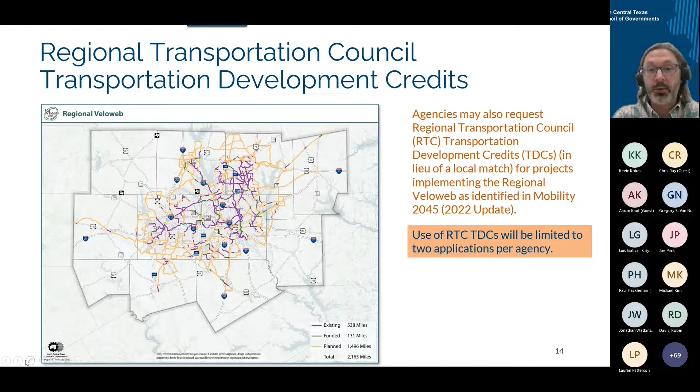So any agency may request the use of regional TDCs. However, that project must be constructing the regional VeloWeb. I'll also note that each agency is limited to 2 applications in which they request the use of regional TDCs. So this is a really great opportunity for making progress on that regional VeloWeb network. Next slide, please.

Overall, we do require some documentation for every application. These include a funding commitment, which can be in the shape of a letter or a local resolution. The funding commitment needs to outline what their local match contribution is, whether they're going to use TDCs or not, and if they're going to provide an overmatch. So that will be a requirement for the application.

We also require that all right-of-way or easements be acquired prior to the application submittal, so all property must be under public ownership. This is a big thing for us, primarily because transportation alternative set-aside funds have a 3-year timeline, or else they lapse. So we really need projects that have the right of way. Any project that has design completed at a certain point is more shovel ready and ready to be implemented and constructed, which is great. So that's part of the reasons for the requirements for this program.

There are other requirements depending on the context and location of your project. These include a railroad right of entry letter. If a project is within a TxDOT right of way, we do require that you also include a district engineer letter of consent.

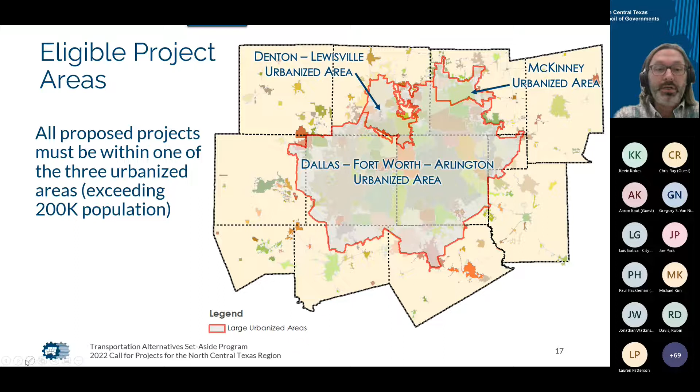And if you're on the fringe of this area and you're not quite sure about your eligibility for a particular project, on the next slide, we did develop an online interactive map for agencies to zoom in into more detail and to look at the eligible area boundaries to ensure that a project is eligible. This map also includes several other data sets used in the evaluation process for several of the application categories. These include the regional Veloweb. I mentioned earlier that the regional TDCs may be used to implement the regional Veloweb. If you want to make sure a project would construct the regional Veloweb, we have that layer that you can turn on.

We also have other data layers used for quantitative aspects of the evaluation process that will help agencies review the competitiveness of their projects. These include demand zones for walk bike travel, rail stations and the half-mile radius around rail stations for eligibility for the Safe Routes to Rail category. We also include data sets related to environmental justice, density of short trips, as well as pedestrian and bicycle crashes. So these are great resources to evaluate your project's competitiveness. Our goal with this map is to help agencies identify the strongest projects to submit, because we always like to have a strong competition for strong projects. So it's a good problem to have.

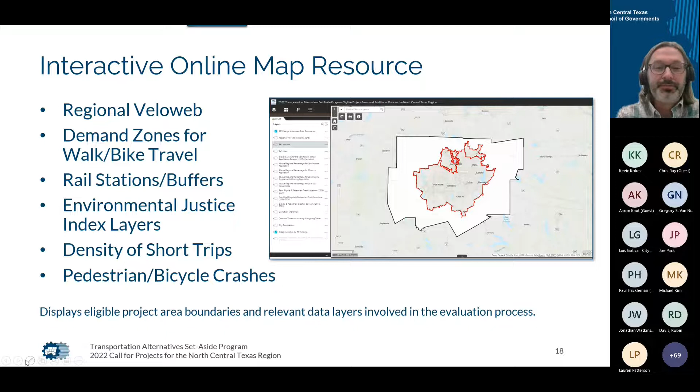So at this point in time, we've discussed the overview of the call for projects. Before we go into the evaluation and scoring of the 4 categories, I wanted to ask Aaron if he had noticed any questions so far that would be worth discussing real quick. Yeah, it looks like Kevin has been doing a really good job of addressing the questions in the chat already. So I think we're good to move on. Perfect.

Daniel, and again, for everyone, this is Kevin Kokes. I did want to note, related to the funding and projects that are eligible to submit in our urbanized area, and what Daniel mentioned about outside the urbanized area, that we do anticipate the state's call for projects opening later this year, and there's going to be a couple options there. There's going to be one for the rural areas and small cities, and then there's also going to be statewide funds. As we know more information when the state has published the rules for those calls, we're going to make that available to everyone. So if you have questions about, well, where's the best place to submit an application?

Is it under our regional call for projects in the urbanized area or to the state? Just contact us and we'll help strategize with you about what might be the most appropriate fit and the best place to submit your application.

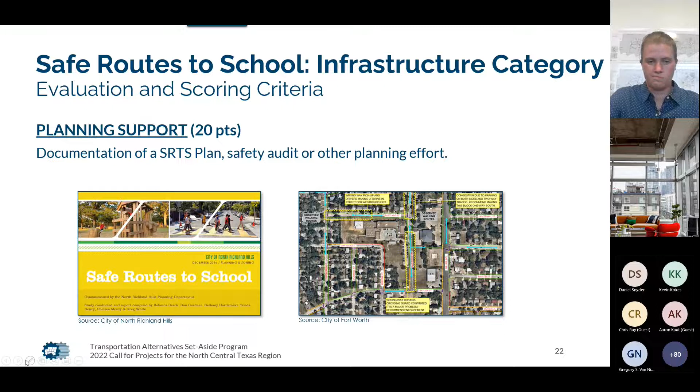For these two categories, potential to increase walking and biking, we're again looking to see the current conditions of students in the area, the distance of the project improvements to the school, any other places that would benefit from this project, and an estimated number of students that'll walk after. Then for equity, we'll be using Texas Education Agency's school report cards and looking at free and reduced lunch statistics.

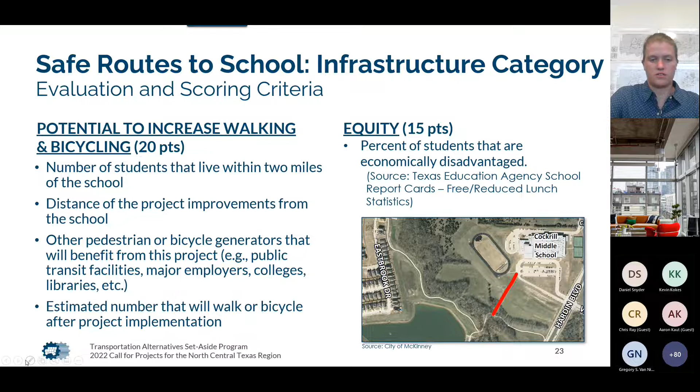Like Daniel said, the transportation alternative funds have a 3-year limit to them. So we're looking to see projects that are going to be ready to go almost immediately. Another big factor for project readiness is going to be support from both the school community and the greater community at large for walking and biking efforts.

Some more information about this Safe Routes to School category. You're able to submit a separate application for each school campus or group the schools in a number of ways: citywide, district-wide, or schools within close proximities that would benefit from the same infrastructure. Again, projects that will perform best on this category have previous precedents of planning efforts, site observations, and community input.

Moving on to education, slightly different criteria since it is a non-infrastructure project, but many of the same criteria will apply.

The activities that are eligible in this category include education materials, training for instructors, safety prizes for students, hiring a manager to run a Safe Routes to School program for a specific area, which could include a city, county, or other division that includes multiple schools, or the cost to hire a consultant to do the above activities.

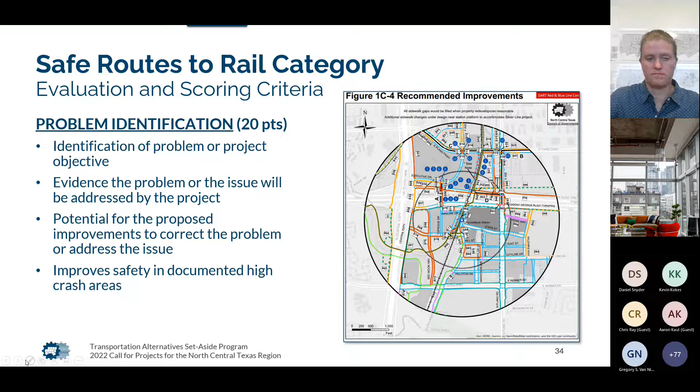Again, we're looking for projects identified as a need coming from a plan - a Safe Routes to Rail plan or another documented safety plan - precedent that this project has been thought about and recommended in the past.

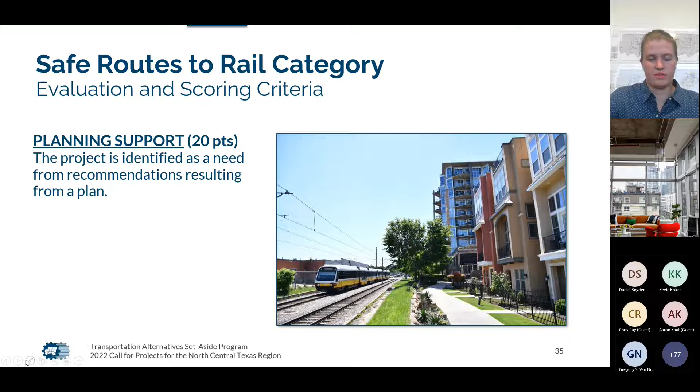We're looking at similar categories and criteria for potential to increase walking and biking, looking at potential transit riders, any other entities that would benefit from this project, the distance of the improvements to the station, and the estimated number of pedestrians and bicyclists after implementation.

The new transit accessibility category looks at whether the project closes a network gap, looking for improved access and shortened distances to access the existing rail station.

For equity, we're going to be looking at different environmental justice factors, including the NCTCOG Environmental Justice Indexes, minority population, and population under the poverty line for census tracts around the rail station.

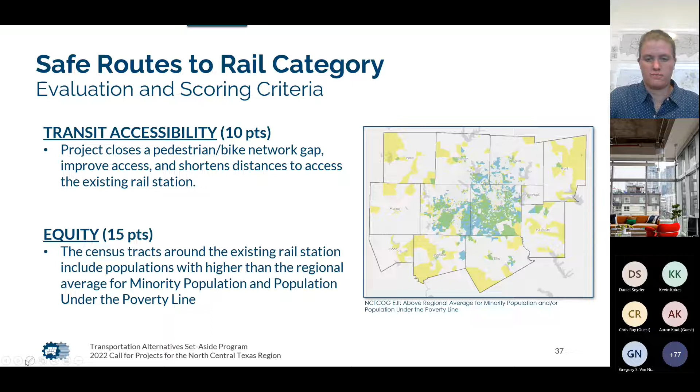Project readiness is very, very similar - again looking for projects that will be ready to go the quickest so we don't risk lapsing funds.

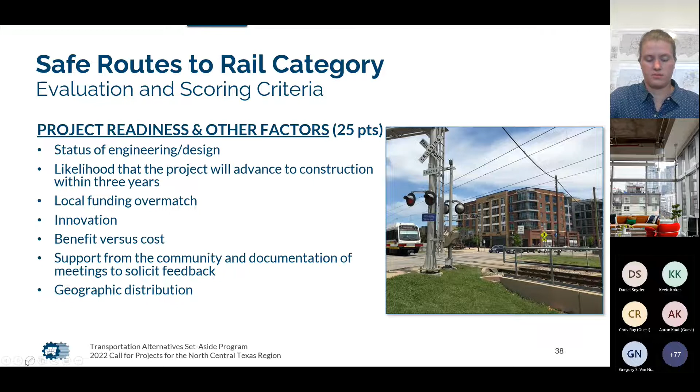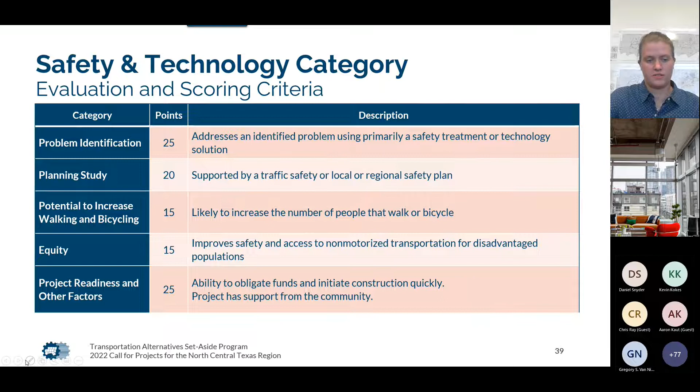Finally, the safety and technology category, very similar to all the rest. For this, problem identification looks for you to identify the problem and also the potential for these improvements to be a safety treatment or technology solution to address the issue.

For planning study, we'll be seeing if the area is identified in the NCTCOG Regional Pedestrian Safety Action Plan, and also if the project is identified in another local safety plan of some sort.

For potential to increase walking and bicycling in this category, we'll be looking at the Mobility 2045 demand zone for walking and biking travel, checking if the area is within a high or moderate demand zone, and again looking at other generators that will benefit from the project.

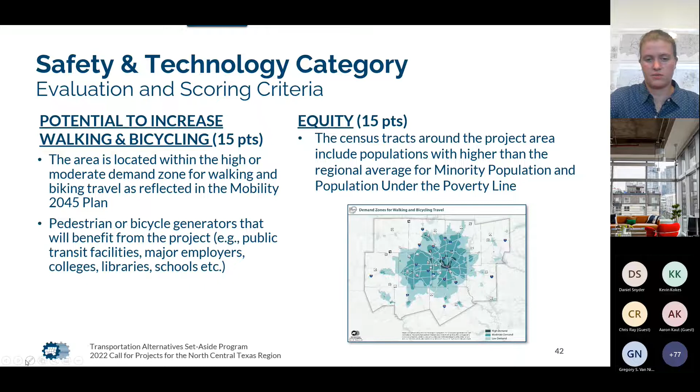For equity, we're again looking at the Environmental Justice Index from COG and other environmental justice factors. And finally, project readiness, again very similar - how fast can we get this going?

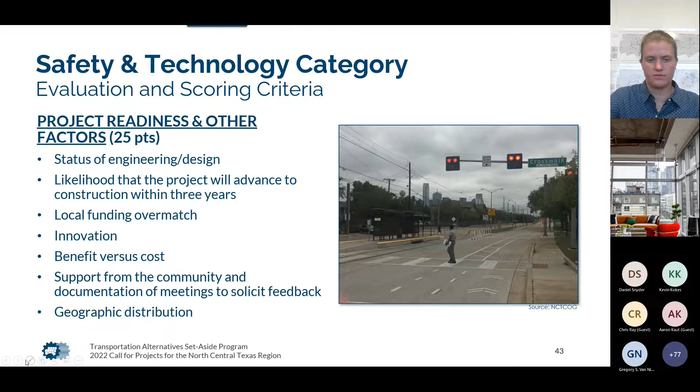And I believe that is it for me, I think. Yes, cool.

Thanks, Aaron. All right, so for the active transportation category, this one hasn't changed a whole lot over the years. At a high level, some of the categories involved are regional network connectivity, with the largest amount of points available.

We also consider access to major destinations, safety and comfort, how a project reduces congestion, equity, and reducing barriers, along with the other application categories we also look at project readiness and other factors. I'll go into a little more detail on the following slides.

At a high level, for the active transportation category, we are looking at projects that are implementing locally adopted plans. For agencies not familiar, TxDOT recently came out with a new tool called the Active Transportation Plan Inventory Tool, where in the application we include a question asking if the agency has submitted the local plan to the inventory. We include a link to the resource on the webpage and encourage agencies to submit their plans online.

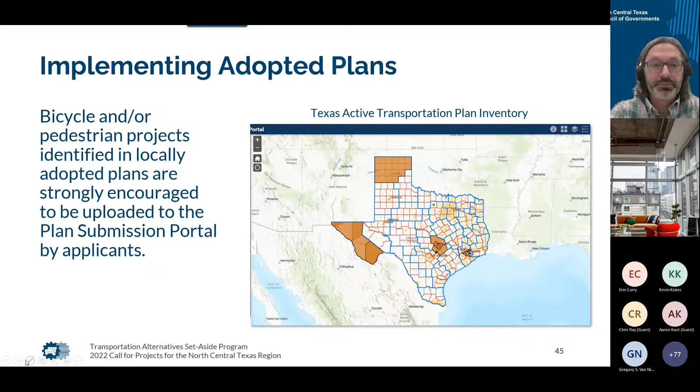With that, let's go to the next slide. The first category is regional network connectivity, where we look at the regional VeloWeb network. However, we also look at projects beyond just the regional VeloWeb.

If there's a project that connects to a regional VeloWeb, that will be taken into consideration. If there's an on-street connection to the regional VeloWeb, they'll get credit there as well. And if there's a pedestrian project that connects to a regionally significant destination, that's also important.

And with that, we can move on to the other categories.

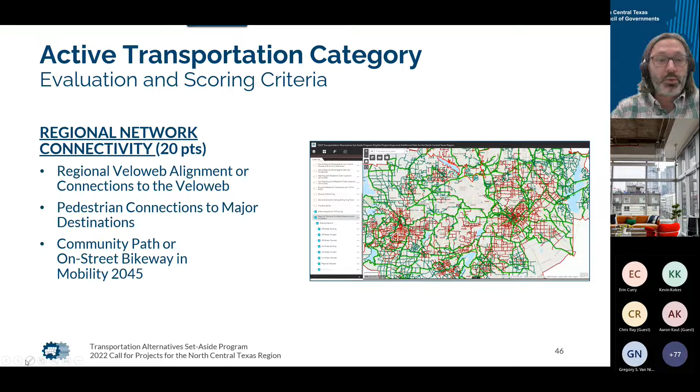That one's pretty straightforward. Access to major destinations looks at connections to employment centers, education institutions, and transit stations if available. We look at projects that close gaps or extend the network, and projects that provide a seamless connection to major destinations, or expand access to them. These are the things we evaluate.

Safety and comfort. Here we look at whether a project is within a high crash density area, so the online interactive map is a good tool to look at crash data and how close it is to your project. If there's a report documenting a safety issue and making a recommendation for a particular project, that will be taken into consideration as well. We also look at the level of comfort for the proposed facility—are you going beyond the minimum to provide the comfort people look for when they walk and bike?

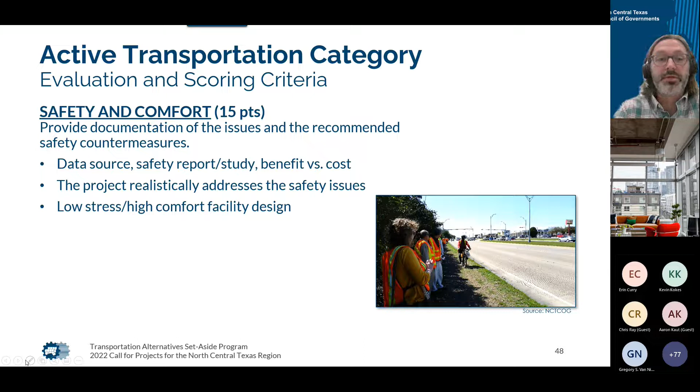Congestion reduction. Here we look at whether a project will contribute to decreasing motorized trips. On the online interactive map, we include a data set related to density of short trips, based on cellular data.

With that, we can look at whether a project is in an area where short trips can best be made by walking and bicycling. COG staff will also use a forecasting tool to estimate the number of people who might walk and bike on that particular project.

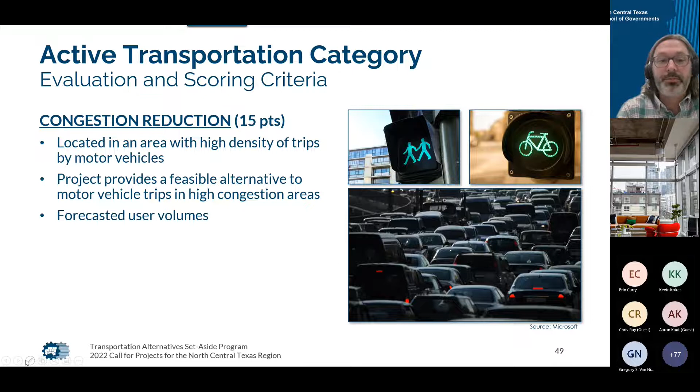In terms of equity, we have equity data on our online interactive map. We look at areas or census block groups that have a high percentage of low income, a high percentage of minority population, or a high percentage of zero-car households.

In the active transportation application, we include an open-ended question for applicants to explain how their project will contribute to equity, since census data only tells us so much. That question is a great opportunity to explain the context of where the project is and who it connects to.

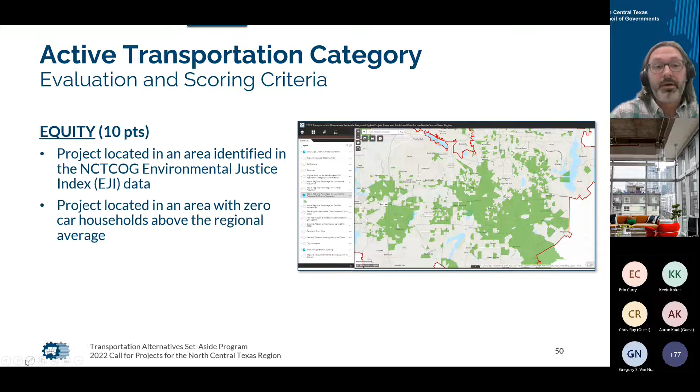For example, perhaps the project connects to a source of fresh produce in a neighborhood lacking fresh foods, or connects to health facilities, or affordable housing. These are things we at the regional level may not be aware of that will improve equity for that population.

Reducing barriers is pretty straightforward—does the project have a grade-separated crossing of a river, a railroad, or a highway? This category will award 5 points for that.

Project readiness and other factors: just like Aaron mentioned previously, if a project has a degree of engineering or design already complete, that will make it a stronger candidate.

If your project has innovative technology or treatments, I can tell you that including counters for your project is a really great way to incorporate technology and innovation. I'll also mention that projects with documentation showing they considered the utilities of the area where the project is located are viewed favorably.

We've had issues in the past where projects were funded in historical neighborhoods where not as much consideration was given, and the amount of utility relocation involved increased project costs astronomically, leaving the local agency responsible for those cost overruns. So we want to make sure utilities are taken into consideration—we want to avoid delaying projects as much as possible.

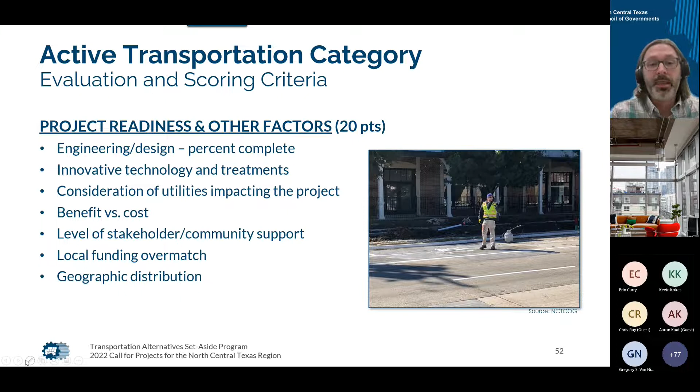All right, so with that, we covered the 4 application categories. I don't know if there's any questions in the chat at this point to discuss about those 4 categories.

Daniel, there was one question about, does it have to be at 30% design? I think the answer is design is not required to have been initiated to submit an application in this call. Obviously, if you completed some schematics, that's great because it helps the applicant understand any challenges or constraints to constructing that project, and hopefully gives a better sense of the project budget needs. But ultimately, the engineering, design, and environmental phases are 100% the requirements of the local applicant, and that would just need to be completed before the construction phase could begin. It's not necessary for that to have occurred before you submit an application.

And I think that's the only other question we've seen, Daniel. Perfect. Feel free to add questions as we go through.

This next section, I'll be highlighting general aspects of the application, regardless of which category you submit under. These are just high-level general aspects. In the application, we want to see a description of the project, what exactly is being requested, and why is that project being requested in the first place. We want to hear the story of what the existing conditions are and what that project will accomplish.

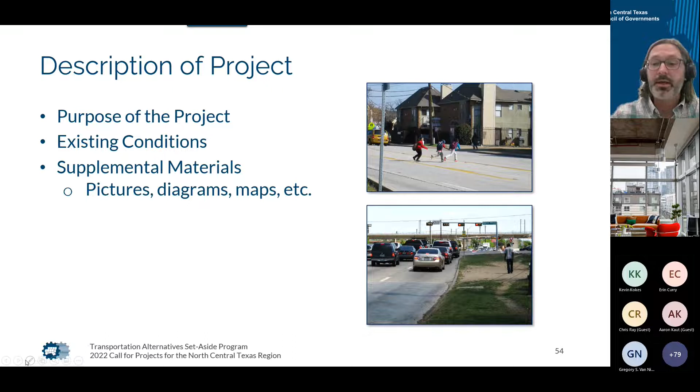On the next slide, we like to ask about the project elements. So what type of facilities are being proposed, and whether that includes not just sidewalks, but perhaps what width is the sidewalk, how many linear feet is the sidewalk. These are the type of elements and information that we ask for.

We also want to make sure that the narrative and what you list for your project elements is consistent with the project budget that you will also be required to include. We want to make sure those line up and are consistent with each other. Next slide, please.

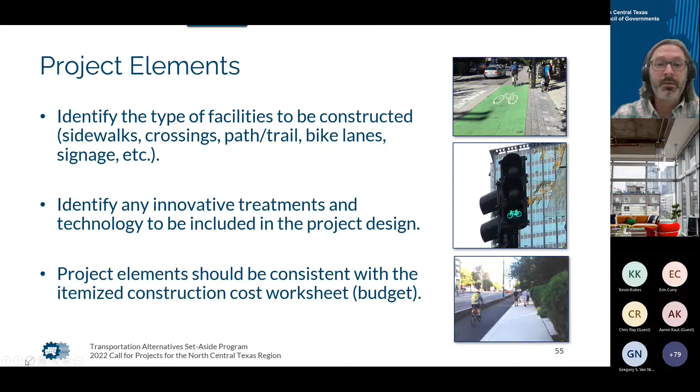Like I mentioned, with the project elements, we do require you to mention the width of the facility being proposed. We want to make sure that it's consistent with AASHTO design guidelines. We ask for how many linear feet sometimes. We also ask what percentage is new construction versus any possible reconstruction. We want to know what that ratio is - is it 70-30, or 80-20, or 100% new construction?

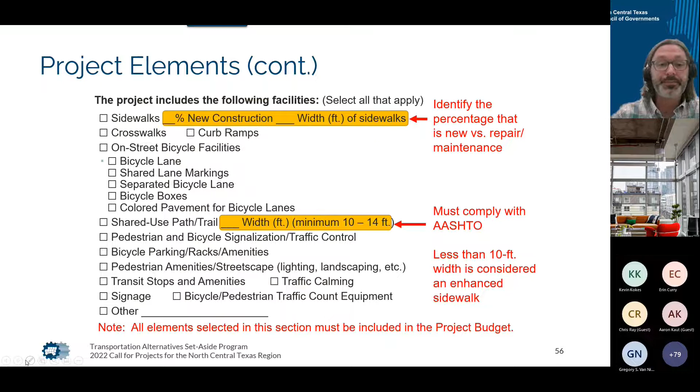Next slide, please. We also want to make sure that the project elements being proposed will be consistent with the design guidelines used by FHWA, whether it's the AASHTO design guidelines or perhaps NACTO. The Texas Department of Transportation has recently updated their roadway design manual to include more information and more design criteria for bicycle facilities, which is a real step up over the past years for TxDOT.

We will note that per AASHTO, a shared use path or a trail, in order to be called a trail, needs to be a minimum of 10 to 14 feet. There is no 8-foot wide trail. An 8-foot wide facility would be a sidewalk better suited for pedestrians only, whereas a trail is meant for both bicyclists and pedestrians. And of course, the more anticipated volume, the wider width is going to be necessary to accommodate that traffic.

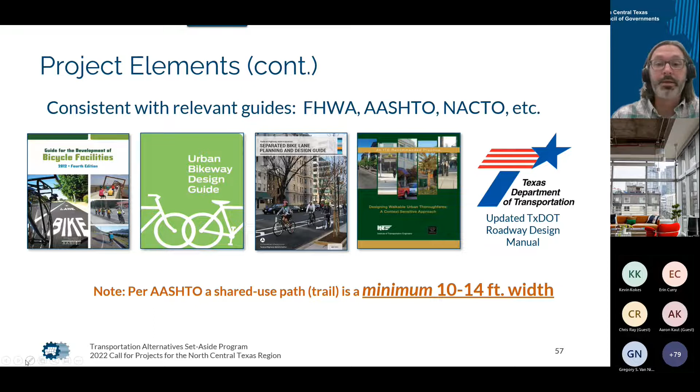Next slide, please. Project maps as part of the applications are really important, and we need those to be as clear as possible in terms of detailing the scope and the limits of the project. The description in the narrative should also match what's being shown on the maps in terms of the limits. The maps are also an opportunity for you to identify the existing facilities in the approximate area, what kind of connections the proposed project is going to make. We also want to show the type of facilities being proposed at which location.

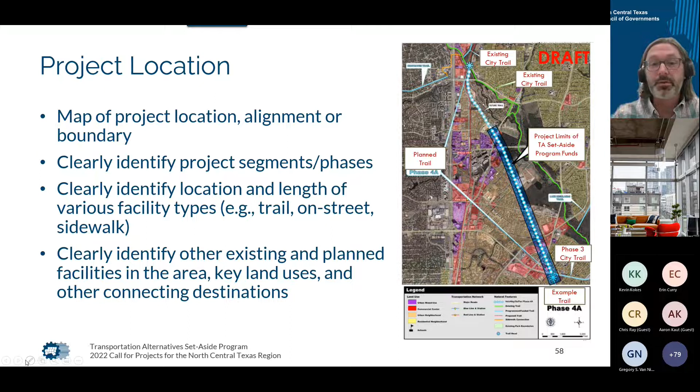And with your applications, you'll also be required to include GIS shapefiles, so that will be another requirement for your application submittal. If you're submitting for a Safe Routes to School project, like Aaron said, those projects need to be within 2 miles of a school. And for the Safe Routes to Rail category, the projects must be within a half mile of that rail station. Next slide, please.

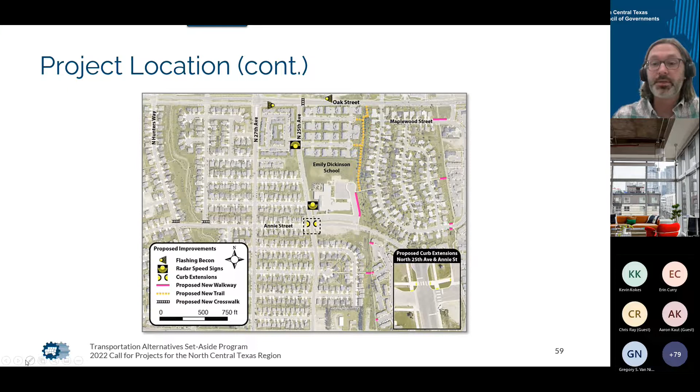So as you work on your application, we do require you to go through the checklist at the end of the application. This is just a tool to help you make sure that what you're submitting is everything that's required, if it's applicable.

So we do require both hard copies and electronic. We require 3 hard copies as well as a USB drive with all the files included.

The call for projects is going to close on September 9th at 5 p.m. We do recommend that you submit as early as possible. We've had applicants in the past that run up to the doorway at COG at the very last minute. Sometimes they make it before 5, and other times they arrive after 5, and we have to tell them that sorry, it's after 5. We are very hard line. We can't accept any kind of applications after the 5 p.m. deadline, and there will be no extensions.

Next slide, please. Like I mentioned, on the COG webpage for this particular call for projects, there's a link to the webpage in the chat box that I added at the very beginning of the workshop. This is where all the application materials are posted, as well as all the resources, a link to the online map. There is one application material that is not quite ready to be posted yet, and this is flagged on the webpage. It is the environmental checklist. This will be required for all the application submittals. However, this will be posted in the near future.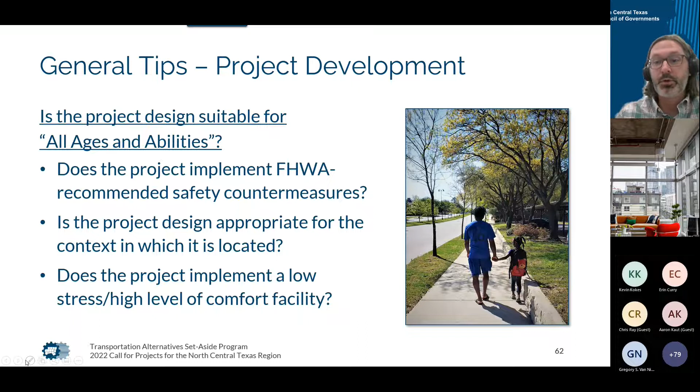Next slide, please. Overall, just some general tips. A lot of the times you hear the phrase all ages and abilities for biking and walking. We ask for this to be considered when you propose your projects. Like I mentioned earlier, people are responding more strongly towards separation from motorized vehicles and more width as well. On the next slide, I can provide more information as to what that means.

So for a low stress, high comfort sidewalk, we are looking at a minimum of 5 to 10 feet to accommodate people with disabilities or multiple people walking past each other. For shared use paths, or otherwise called trails, we are looking for a minimum of 10 to 14 feet to accommodate various volumes of traffic of people walking and biking.

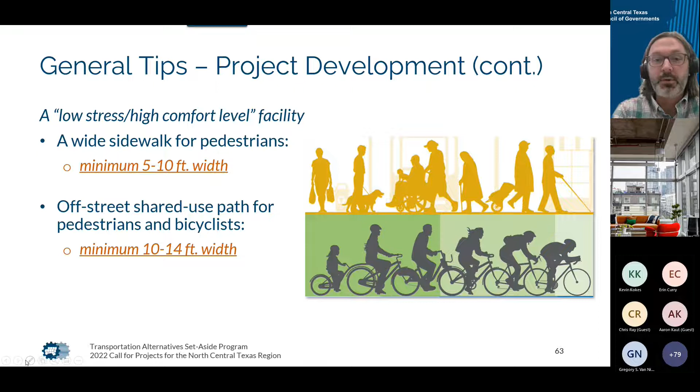And if you're proposing an on-street bicycle facility, there are some factors that should be taken into consideration as to the type of on-street bikeway that you are proposing. Of course, there's various design types of on-street facilities, which include conventional bike lanes, separated bike lanes, and buffered bike lanes. So there's several options in your toolbox to choose from. However, motorized vehicle volumes and speeds should be taken into consideration. This graphic here is from the TxDOT Roadway Design Manual, and it's basically helping agencies identify the level of separation based on the volume and the speed of the roadway if it's on street.

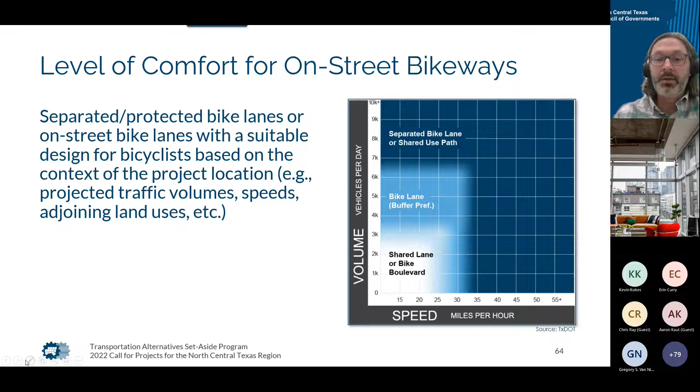And with that, we can go on to the next slide. So in terms of the project implementation, we do include a project schedule template, which we can give a preview in the next slide. This template is to help applicants map out how their project will be implemented within the 3-year timeframe that's necessary for the transportation alternative set-aside funds. It includes various phases: project initiation, design, utilities, right-of-way, and construction.

And the first half, or the first section, of the project schedule is grayed out, and it shows the timeline for the project initiation. That aspect of the project development process is kind of already mapped out for you because it's going to go through a process where projects are submitted into the TIP and for FHWA approval, and then for the execution of the agreement with TxDOT.

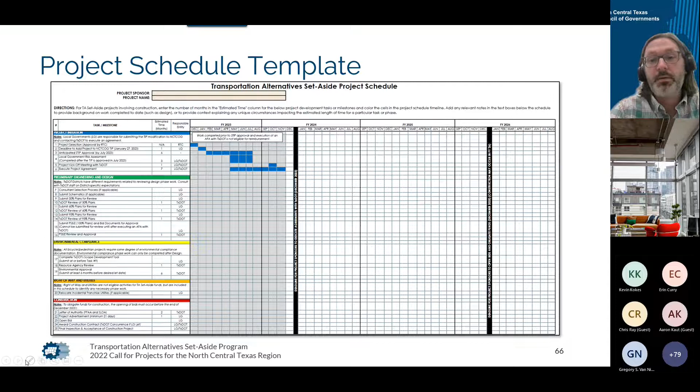Beyond that is where applicants are going to be required to show how they're going to do their design and their construction. So this file is made in Excel. On the next slide, here we can see it's basically a traditional Gantt chart. Applicants can just copy and paste and map out each cell related to how long they anticipate that phase of the project will last.

We include aspects of coordination with TxDOT. We've worked with our TxDOT partners to identify how long some phases traditionally will take in order to develop a realistic schedule. So we really encourage these project schedules to be as realistic as possible in order to make sure that these funds get obligated in time. Any kind of delays in projects is going to be a risk for lapsing. It might involve a modification to the transportation improvement program, which will cause a delay. So pay special close attention to your project schedule. We do show when the agreement with TxDOT needs to be executed, and we also show the deadline for obligating the funds in the project schedule template as well.

So this workshop has been covering the call for projects. The call for projects is administered by the Council of Governments. However, if a project is awarded funding, it then goes through the implementation process, which is overseen by TxDOT. So I just want to make it very clear that COG does not implement or oversee the project. COG is merely in the business of evaluating the projects and determining the strongest projects for funding. We then work with TxDOT to make sure that they get obligated in time.

Thank you, Daniel. Hi there, I'm Rachael Twiggs, and I am the local government coordinator for the Dallas District. I'll be going over the local government process after your application has been approved and you've received your funding. You can go to the next slide, please. So this is kind of a flow chart that explains the process. I will start by saying that things can be slightly different based on if you are working with the Dallas district or the Fort Worth district, but this is going to be a good overall understanding of how the process works.

So after your application has been approved and funding has been awarded, you will then submit your TIP mod within the next 30 days after approval. After you get approval of that TIP modification, you will send that to the district, and that will basically trigger the drafting of your advanced funding agreement, which is your AFA. With the AFA, we need a couple of documents. We'll need your local government resolution, as well as your risk assessment. Both of these will be included in your advanced funding agreement.

After the agreement is executed, we will then be able to move forward with the project, and we would request the local government's first payment. This payment is basically the TxDOT direct state cost for our review. After that is received, we will be able to activate the project in PeopleSoft. After we have the funds and it's been activated, we're then able to have the kickoff meeting. That will include the local government staff as well as their consultant, if there is one. We will go over in great detail all of the different aspects of the project, what's required, and make sure that everybody is on the same page.

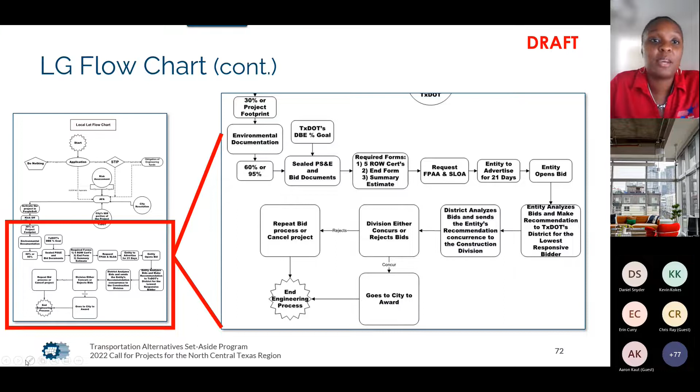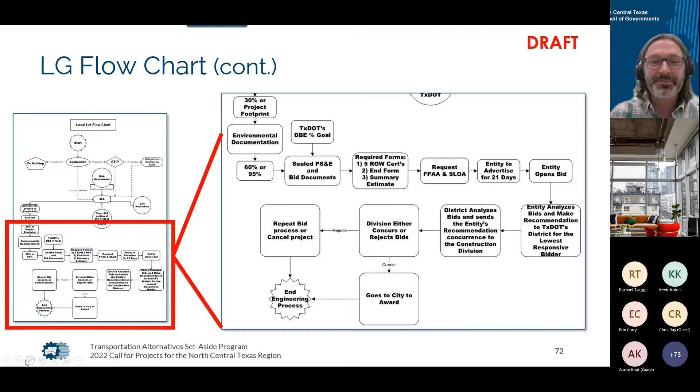On to the next slides. Last but not least, we'll be covering the project budget. And we can go on, yep. So the project budget is an Excel file for applicants to fill out. So this is where you'll be providing a detailed list of everything that is being requested for funding.

So on this project budget summary form, we will be asking you to identify the anticipated fiscal year for construction letting. The reasoning behind this is because the form will be taking into account inflation. I'm sure everyone is well aware of recent inflation increases in the past year or two and how they're impacting the cost of projects. We want to be proactive and make sure that inflation is being considered at the very beginning so that project cost overruns are minimized as much as possible. So inflation will be considered into your project costs.

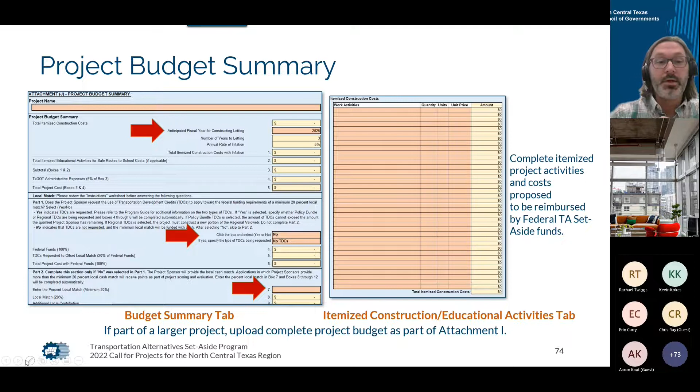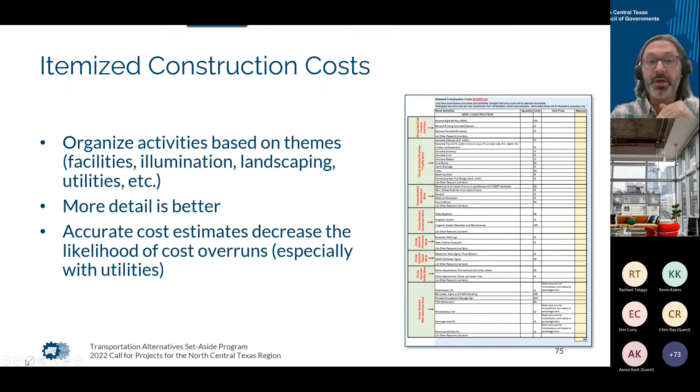So overall, we do ask for as much detail as possible in the project budget. We do not want to see lump sums. And we will be having project engineers reviewing the cost estimates here at COG. They will be involved in the process to see what's reasonable and what's not reasonable. We do include an example tab in the Excel workbook just to show a best practice of what's an itemized construction cost. We can go on to the next slide, please.

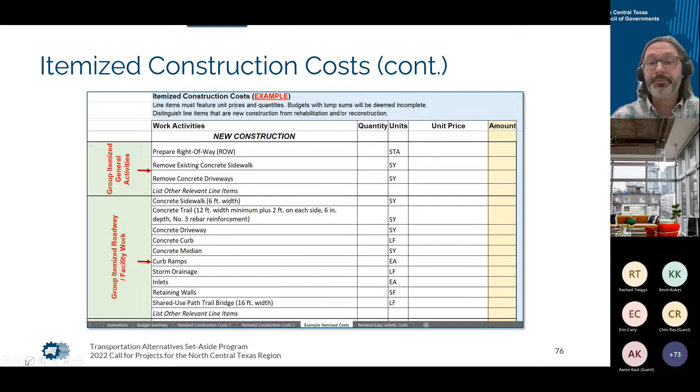And on this slide, we go into more detail into all the different activities that are being proposed. In the itemized construction lists, we ask that you list the new construction, the quantity, the unit of that line item, as well as the unit cost. The sum will be automatically calculated. We do recommend that you group items based on the theme. We also want you to identify if there is any reconstruction that's being proposed to distinguish that from new construction as well. Next slide, please.

Overall, just like how the project schedule is important in order to avoid lapsing of funds, the project budget is really important to avoid cost overruns. So make sure that you pay special attention to your budget. And again, like I mentioned earlier, make sure to account for utility needs. And we will also add that the scope of your project cannot be substantially different after it's been awarded funding as well.

And with that, we can go on to the call for projects schedule. So yesterday the call opened. Today we're here with our workshop. The call will close on September 9th. However, there are two important deadlines between now and then that you'll need to keep in mind. If your agency requires technical assistance with GIS, we ask that you submit your request for help by August 17th to COG staff, and COG staff will help you with that.

If your project is within TxDOT right of way and requires a letter of consent from the district engineer, on behalf of our friends at TxDOT, we ask that you submit those requests to them by August 19th. Again, your points of contact will be either Rachel if you're in the Dallas district, or Iftikhar if you're in the Fort Worth district.